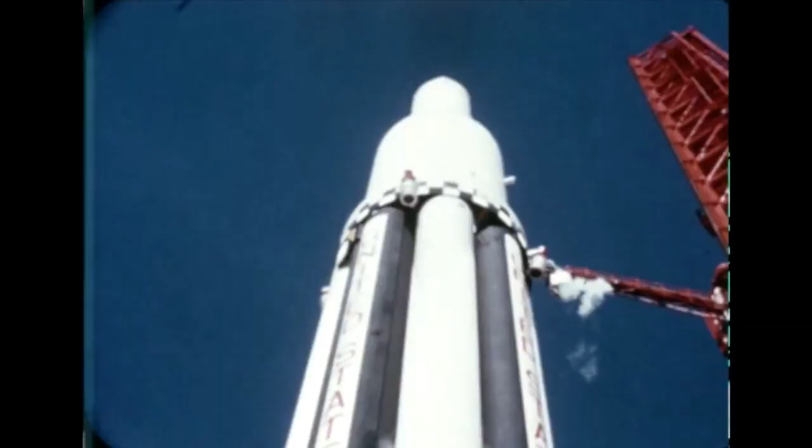Highlighting this report period on November 16th was the successful launching from Complex 34 at Cape Canaveral of the third Saturn C-1 flight vehicle, SA-3.

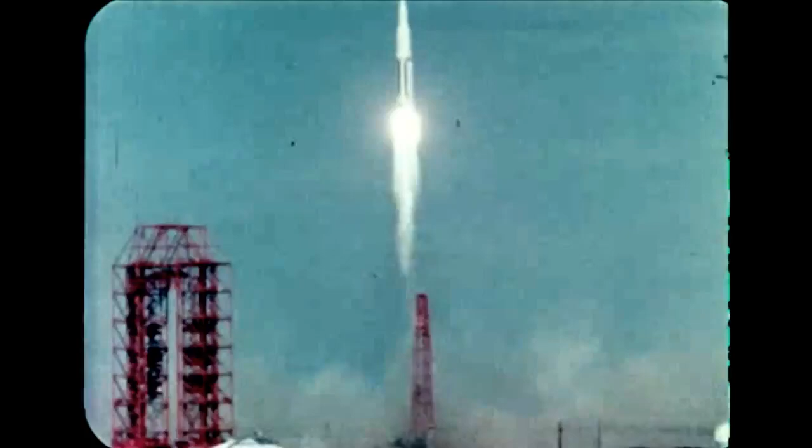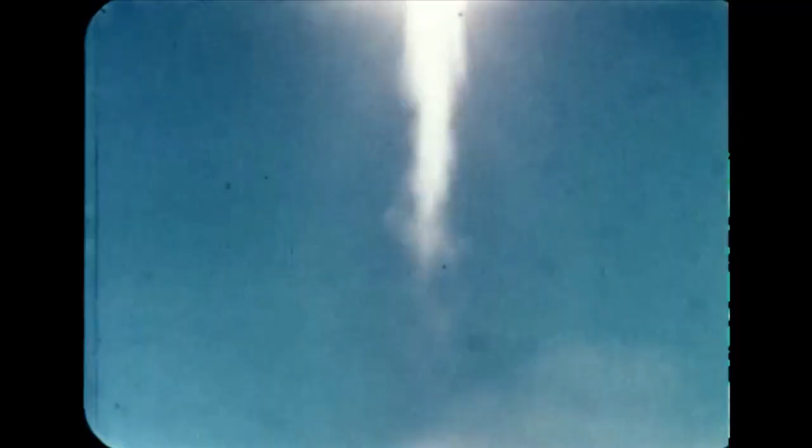Similar in major aspects to the previously successful SA-1 and SA-2 flights, SA-3 performed several additional missions contributing to development of the Block II SA-5 and beyond version of the vehicle. For example, an engineering model of the ST-124 stabilized platform was carried as a functional passenger, though not in control. And although no stage separation was attempted, Block II retro rockets were successfully test-fired.

The booster carried a full load of propellant, some 750,000 pounds, instead of the 620,000 pounds carried earlier. SA-3's weight was almost as great as that of later vehicles, which will have 188,000-pound thrust engines, although SA-3's 8 H-1 engines were rated at 165,000 pounds thrust each.

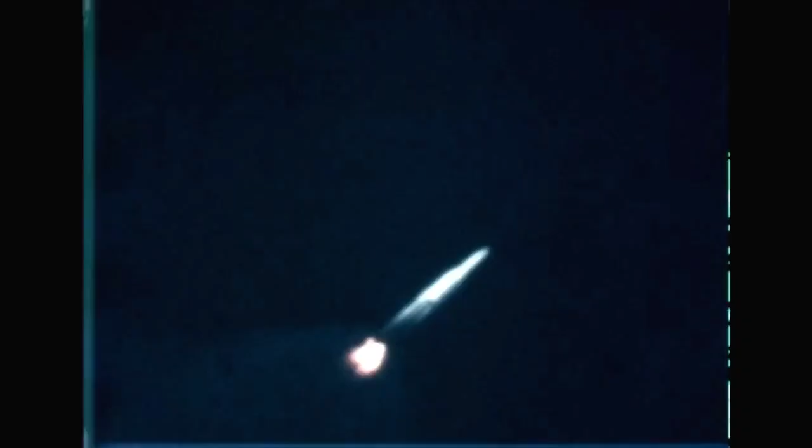SA-3 was the most heavily instrumented rocket ever launched by the United States, transmitting 716 measurements to ground stations. Analysis of telemetry data indicated that the vehicle performed precisely as expected. SA-3 reached maximum altitude of 104 miles, range was 270 miles, and velocity 4,000 miles per hour. Flight time to impact was slightly over 8 minutes.

SA-3's two inert upper stages, laden with 95 tons of water simulating fuel, were deliberately exploded on schedule at 104 miles altitude, 292 seconds after liftoff, in a study of the basic physics of the ionosphere. Satisfactory data on this experiment, known as Project Highwater, were recorded. A similar experiment had been conducted on the SA-2 flight.

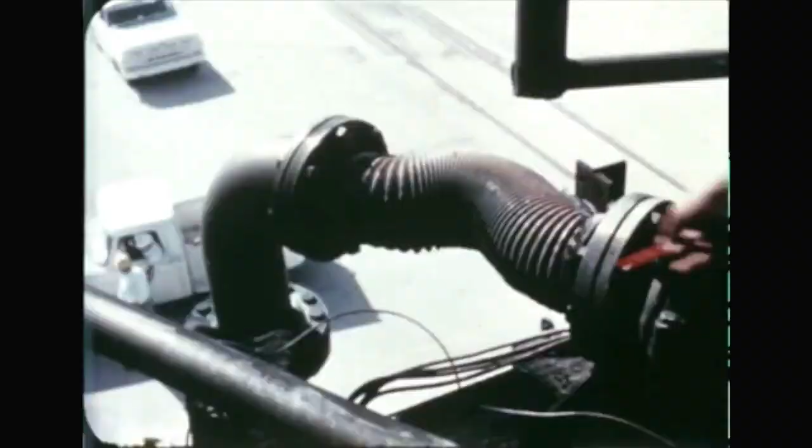More damage was done to ground support equipment by SA-3 than on previous launches because of lower liftoff acceleration resulting from the additional 130,000 pounds of propellant. However, damage was not considered excessive.

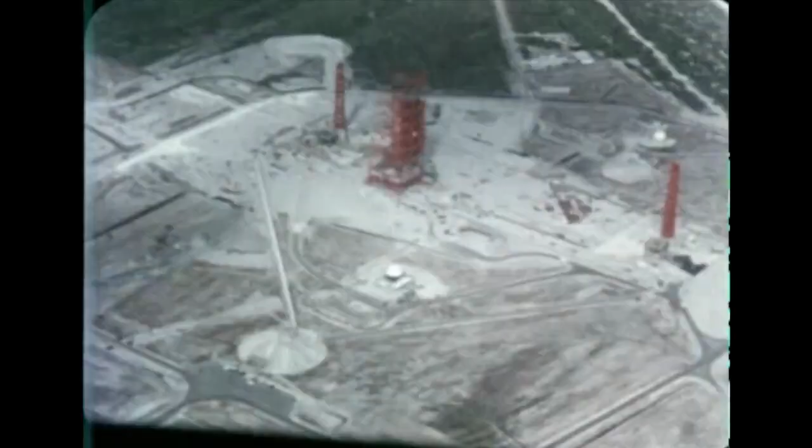Half a mile north of SA-3's launch site, construction progress is on schedule at Launch Complex 37, being built to handle launching of Block II vehicles. Pad B is expected to be operational in March. Beneficial occupancy and final inspection of the Launch Control Center was accomplished in early November. Work on the launch site surface structure is progressing, with hydraulic lines being installed and work on pneumatic lines underway.

Pad A is scheduled to be operational about 3 months after Pad B. Erection of primary structural steel for the umbilical tower is complete, and delivery of structural steel for the launch pedestal has begun. At the automatic ground control station, concrete is being finished and drains and electrical conduit installed.

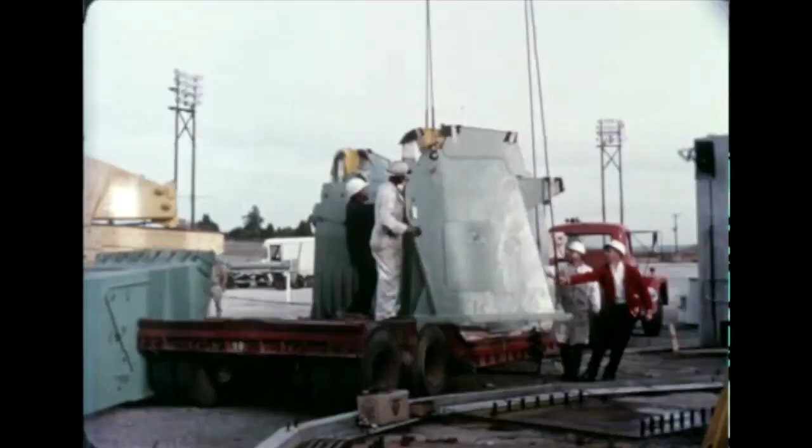The new combination support and hold-down arms for Block II launch pedestals were delivered by the manufacturer, Hayes International of Birmingham, to the Marshall Space Flight Center this quarter for testing. Afterwards, they'll be shipped to the Cape for installation at Launch Complex 37. The arms will support and hold down the Saturn vehicle after ignition until proper thrust condition for liftoff.

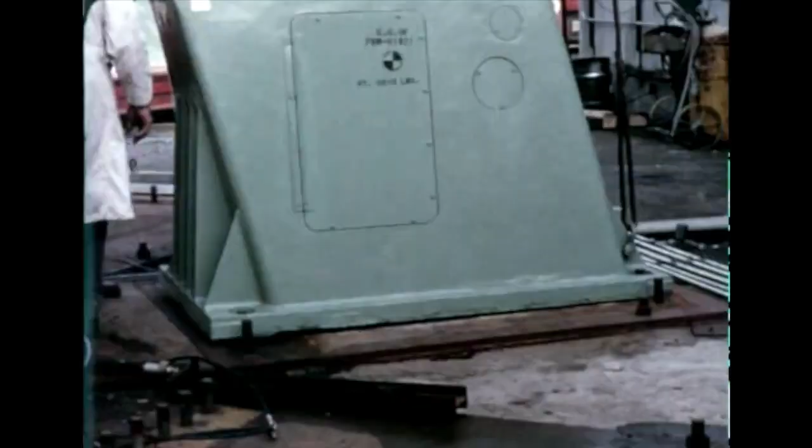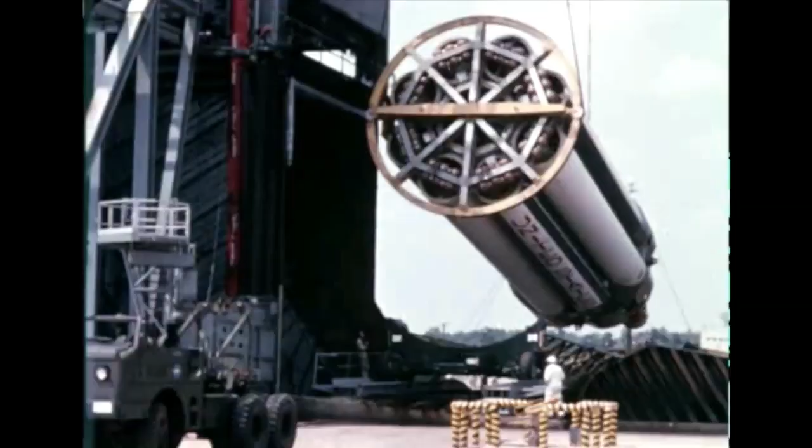The fourth Saturn flight vehicle, SA-4, was removed from Marshall's static test stand on October 1st, having completed its static testing with a full duration firing the previous week. After undergoing post-static rework and modification, the SA-4 booster was transferred to final checkout on October 22nd.

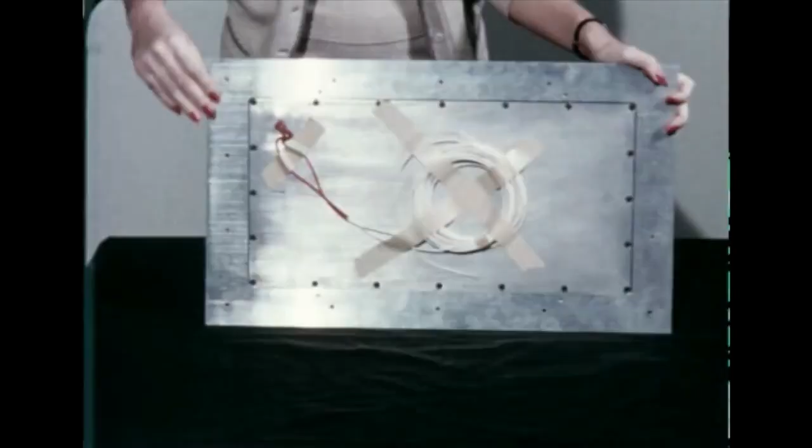A micrometeorite detector device designed to measure the density of small, high-speed particles encountered at high altitudes will be initially flown aboard SA-4 as an inactive passenger to see how it withstands environmental conditions. If telemetered results are satisfactory, the device may be operative on later Saturn flights.

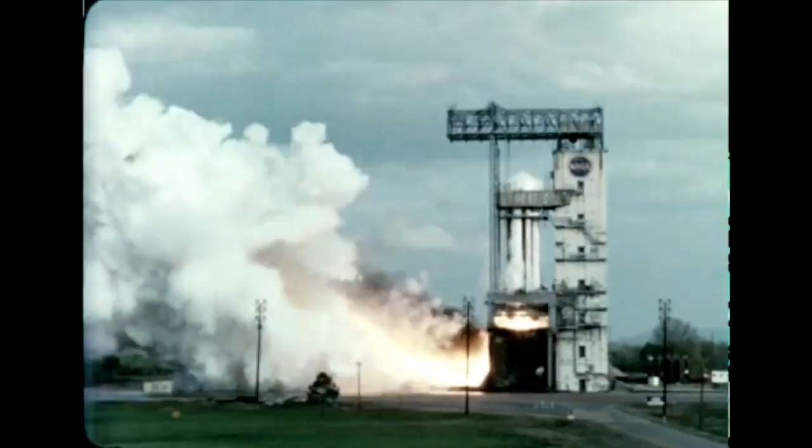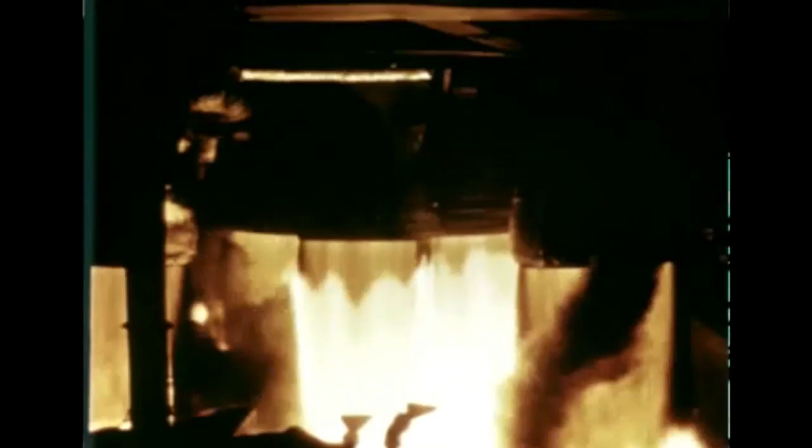Three static firings of the test booster SA-T4.5 were held during this report period, with engines developing 1.5 million pounds thrust. Test objectives were to check integrity of the propulsion system and effect of the 188K engines on the flame deflector. The test booster was removed from the stand on November 15th.

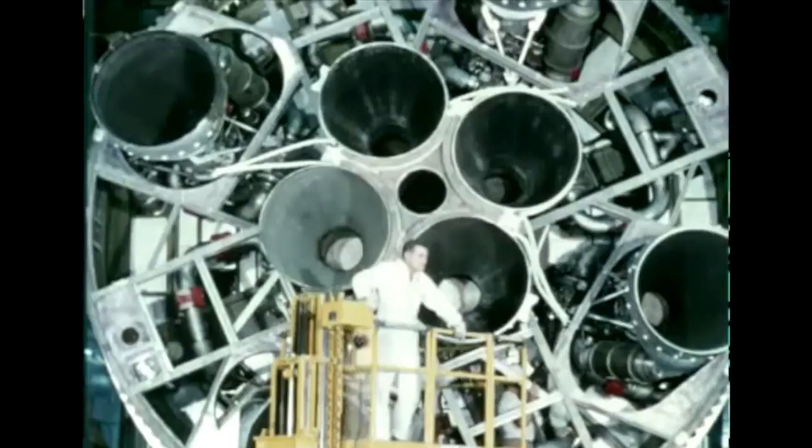The final engine was installed on the booster for the fifth Saturn flight vehicle, SA-5, on October 11th, and the stage was later released for pre-static checkout, expected to be completed in mid-January. A decision has been made to fly a Jupiter-type payload body on SA-5 rather than the Apollo boilerplate configuration as originally proposed.

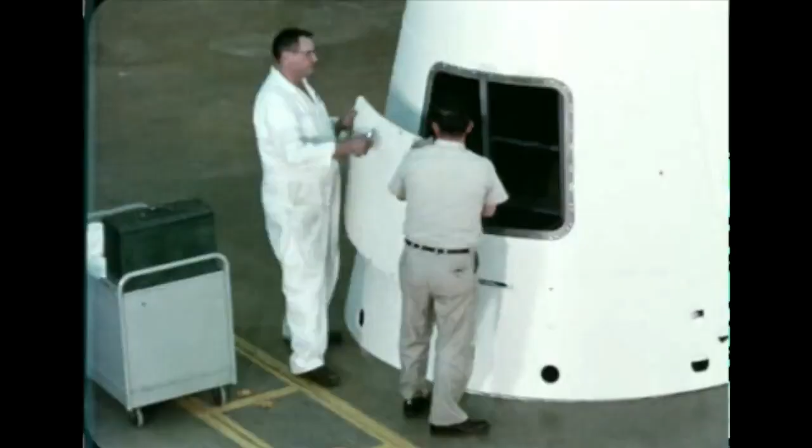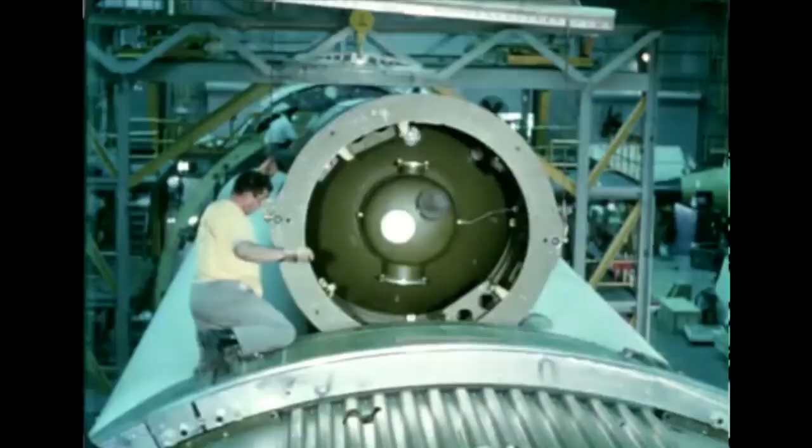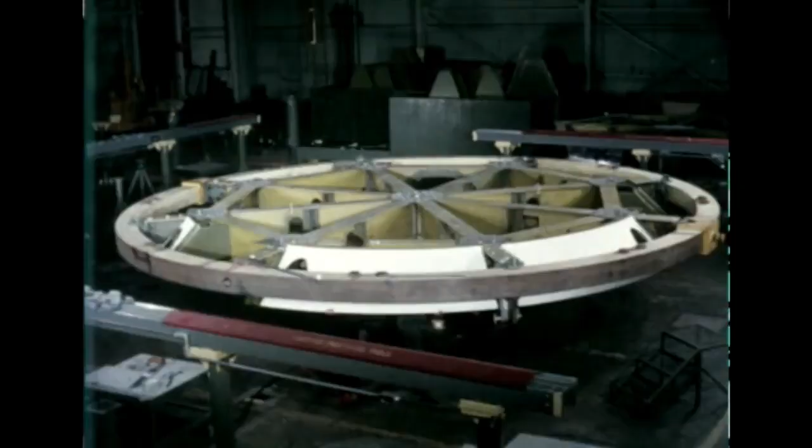Assembly of the booster for the sixth Saturn flight vehicle, SA-6, begun on September 24th, proceeded this quarter with clustering of tanks completed and installation of engines underway. Fabrication of the tail section of the booster for the seventh flight vehicle, SA-7, was finished in December. The vehicle's interstage adapter was also completed. SA-7 booster assembly is scheduled to begin in January.

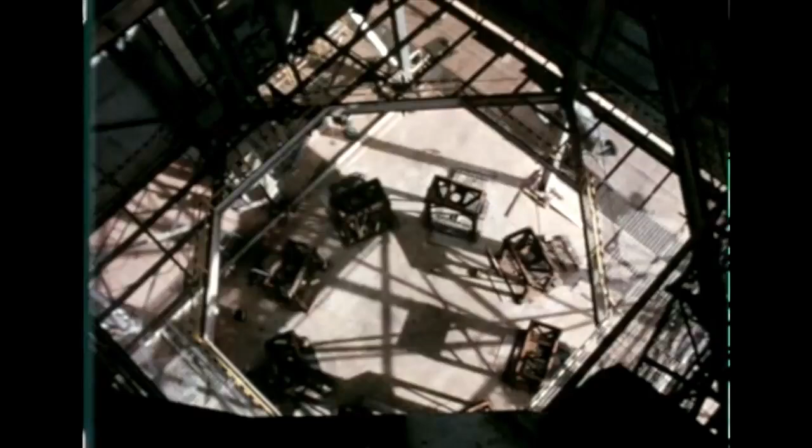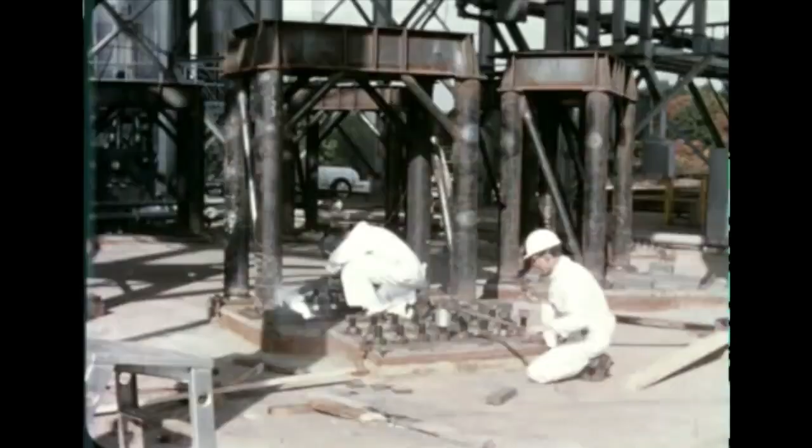Modification of Marshall's dynamic test stand to accept the dynamic test vehicle SA-D5 was finished in October. Major alterations included cutting away of a portion of the grillage in order to accommodate the longer Block II type vehicle, plus installation of new support pedestals at the base of the stand.

Assembly of the Block II dynamic test booster was completed early this quarter, and the stage was erected in the dynamic test tower on November 13th after weighing and center of gravity determination.

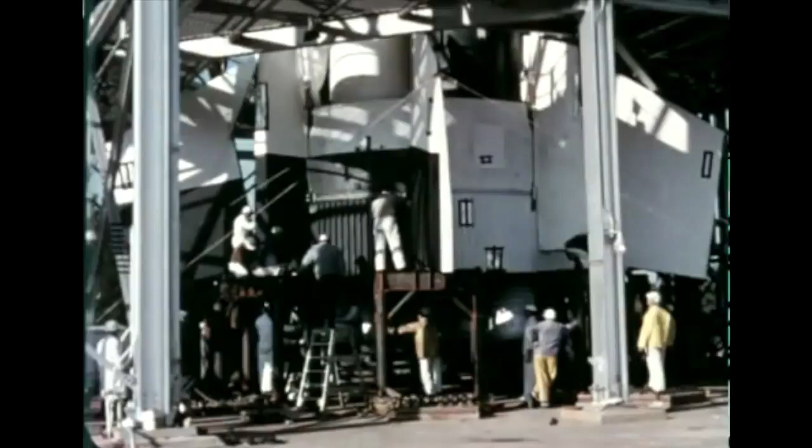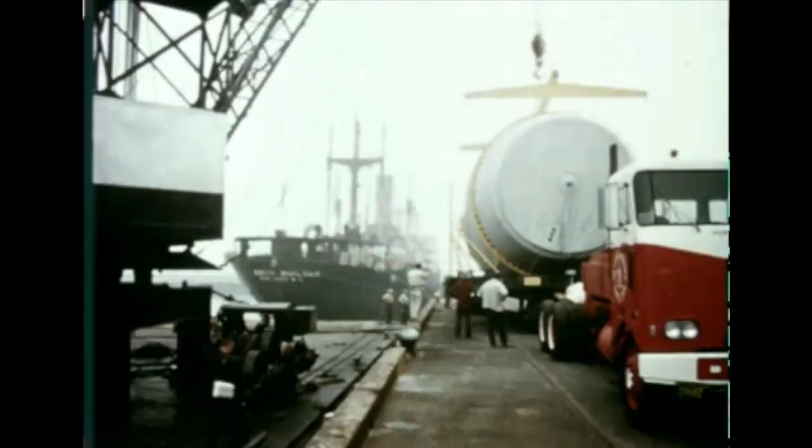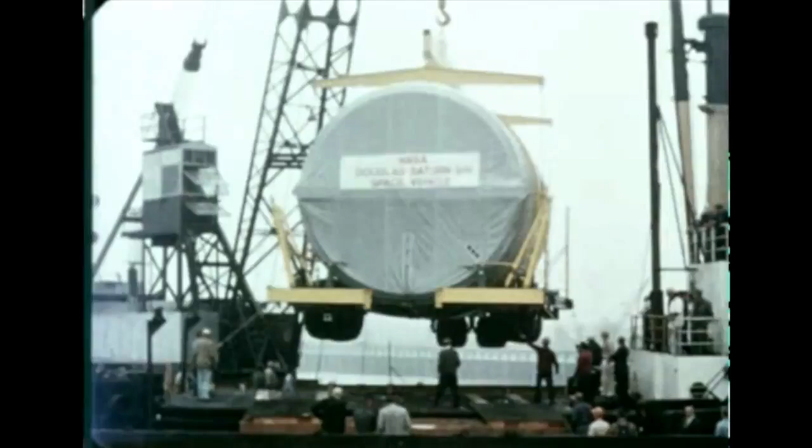The S-IV hydrostatic dynamic stage, which forms the upper stage of the SA-D5 dynamic test vehicle, was completed this quarter by Douglas Aircraft Company, S-IV prime contractor at Santa Monica, and was prepared for shipment. On October 26th, the stage was moved from the Douglas plant to the docks at nearby San Pedro. Cradled in a specially built 25-ton transporter, the S-IV was loaded aboard a steamship to begin its 3,500-mile journey to the Marshall Space Flight Center.

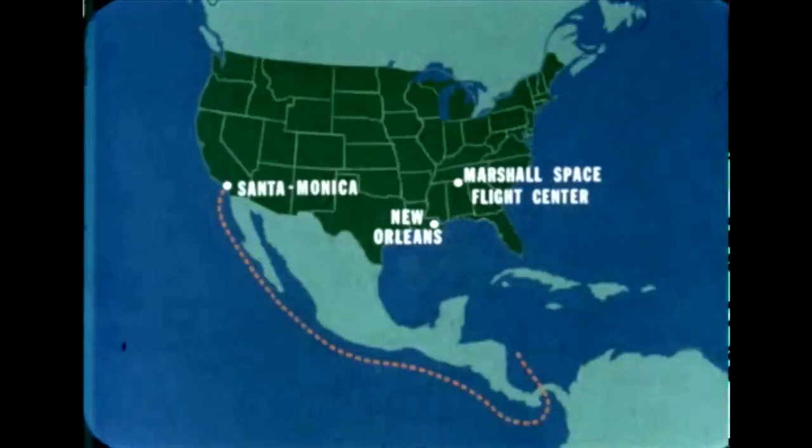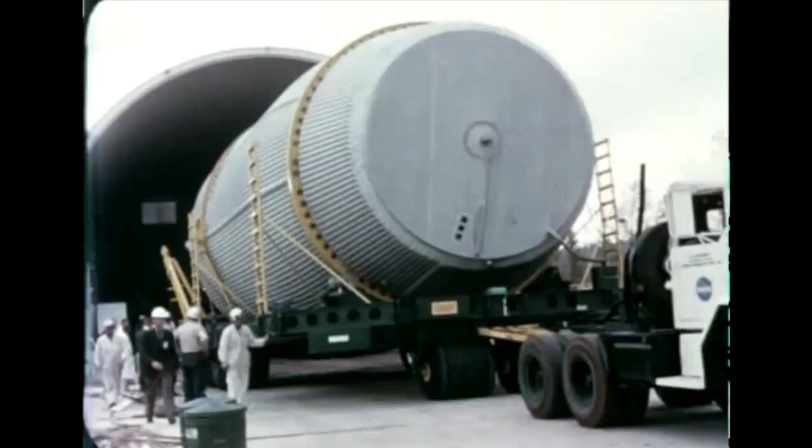This marked the first time a Saturn stage has been shipped by water from a West Coast manufacturing site through the Panama Canal to a test or launch site in the east. Other stages will follow. The S-IV stage arrived at Marshall on November 16th after a 23-day journey. It had been transferred to the Saturn barge Promise at New Orleans for the river portion of the trip.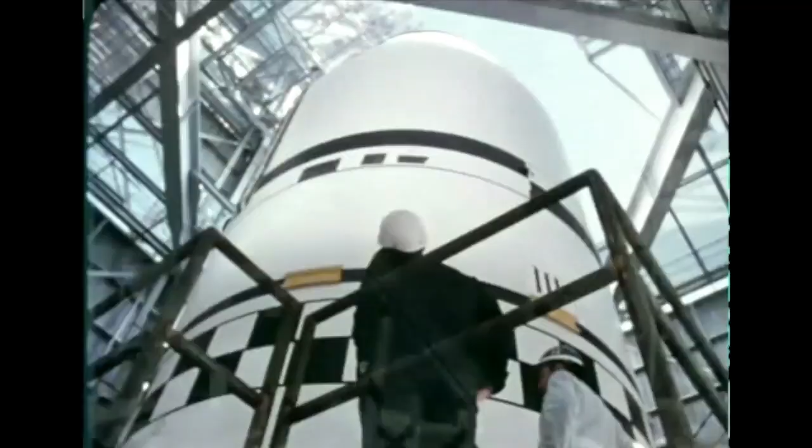At Marshall, the S4 stage was installed atop the SAD5 booster. The stage is scheduled to remain at Marshall for several months. Its external configuration, weight, and other characteristics are the same as those of the flight stage, which will be a part of SA5. After installation of the instrument unit, payload adapter, and payload to complete the vehicle, SAD5 was made ready for dynamic testing, scheduled to begin in January.

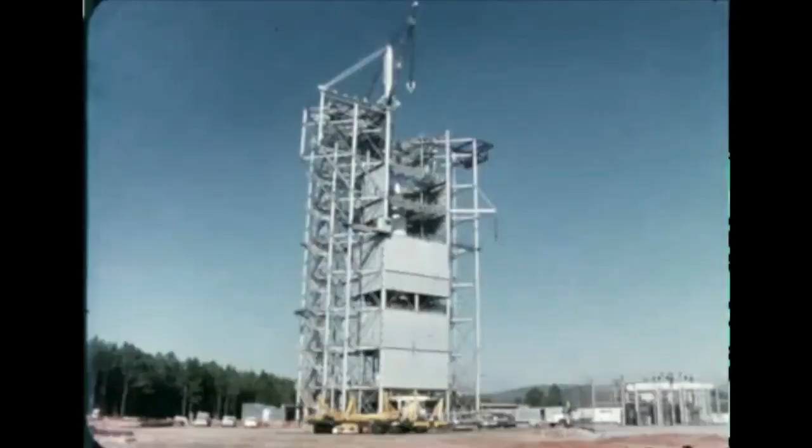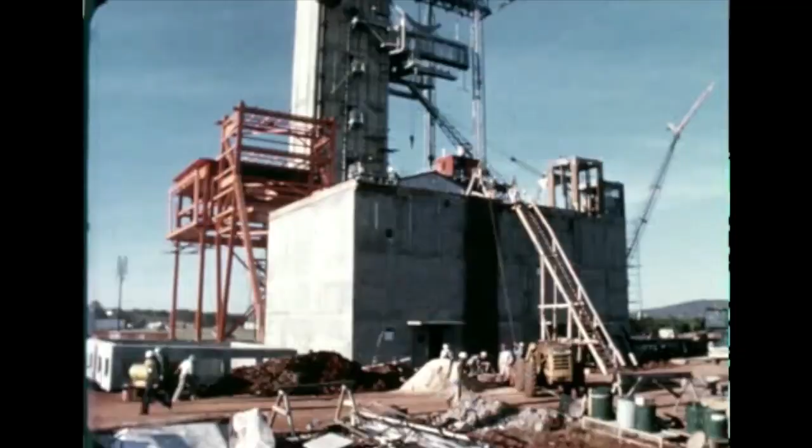Modification of Marshall's C1 static test stand to accommodate two boosters continued this quarter. Steel superstructure and basic plumbing now stands at the 4th level. Adjacent to the stand is the annex, which will house office and shop personnel. Units such as the elevator, air conditioners, and heating ducts are being installed.

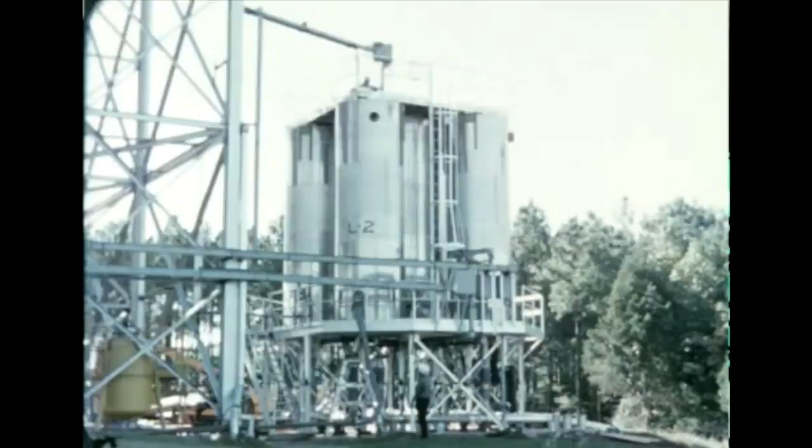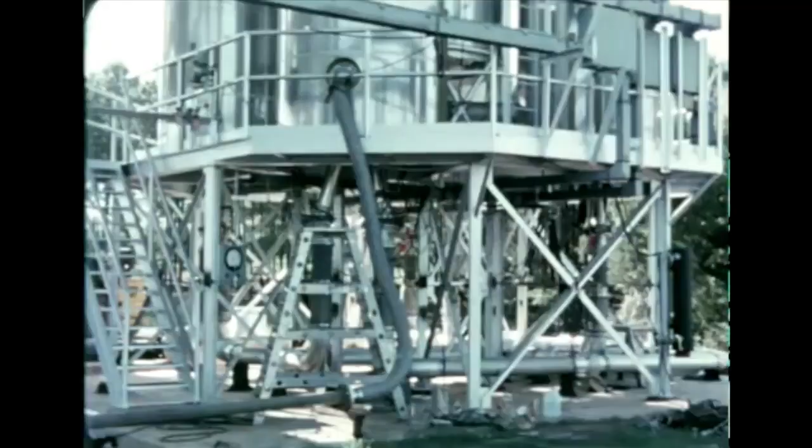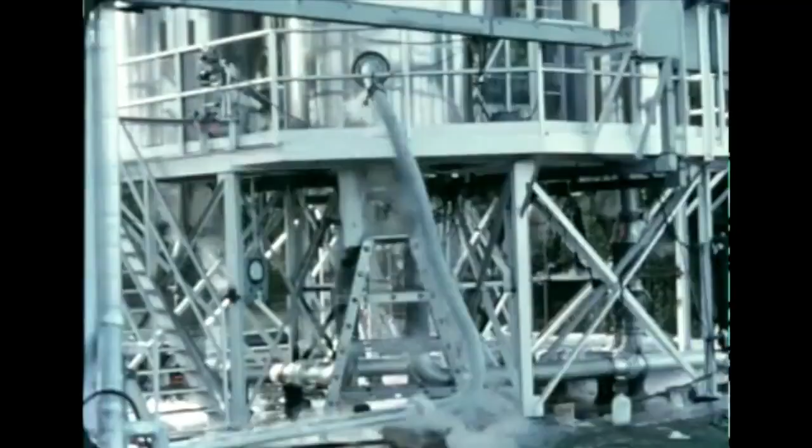Using a scale model of the Saturn booster tank assembly, a series of liquid oxygen boil-off tests were run at Marshall to determine system flow under simulated flight conditions. For safety, liquid nitrogen was used to simulate LOX. Purpose of the test is to find out how much boil-off occurs in a given time and to verify that tanks empty simultaneously.

Discharge tubes carry the liquid nitrogen from the test stand to the point of discharge. Liquid nitrogen vapors hold close to the ground and are highly visible. Line flow is monitored by movie cameras to study vortexing conditions in the suction line and undesirable gassing in the system.

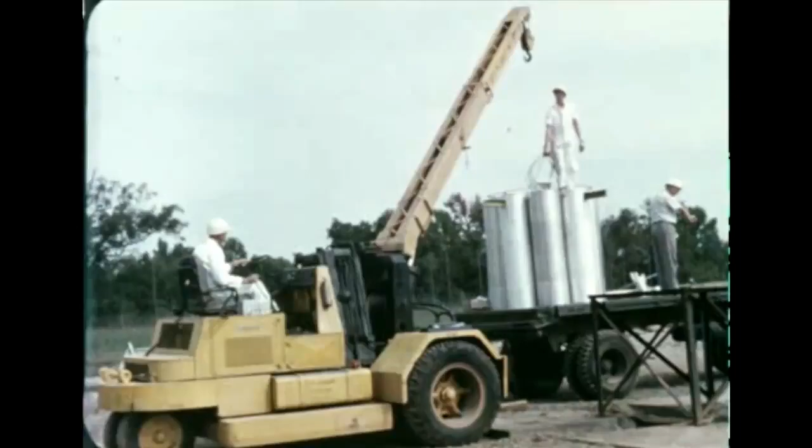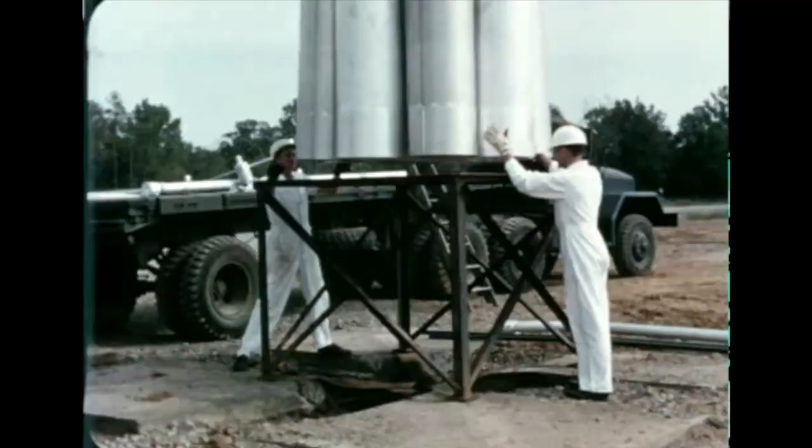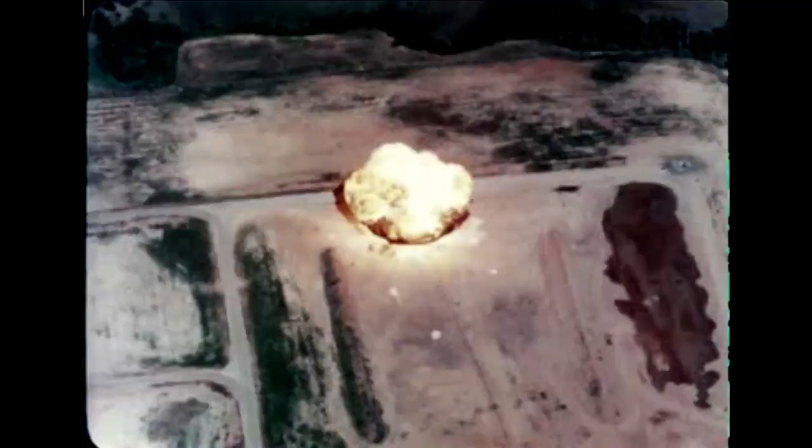Using scale model tanks to represent Saturn boosters, tests are being run at Marshall to determine the most desirable method of controlling propellant dispersion in event of range safety destruct or accidental explosion. An external destruct system has proven most effective using primacord and flexible linear-shaped charges installed longitudinally on the cylindrical portions of all tanks. Upon ignition, these charges rupture the containers, and internal tank pressure causes an outward dispersion of the LOX and RP1 propellants, greatly reducing their mixture and the resulting explosion. After engineering refinement, the external destruct system will be employed on SA-5 and subsequent vehicles.

The first two production models of the ST-124 stabilized platform were delivered to Marshall this quarter by the manufacturer, Bendix Corporation. ST-124 units will be flown as functional passengers, though not in command, aboard SA-5 and SA-6. Beginning with SA-7, the ST-124 will be the command unit.

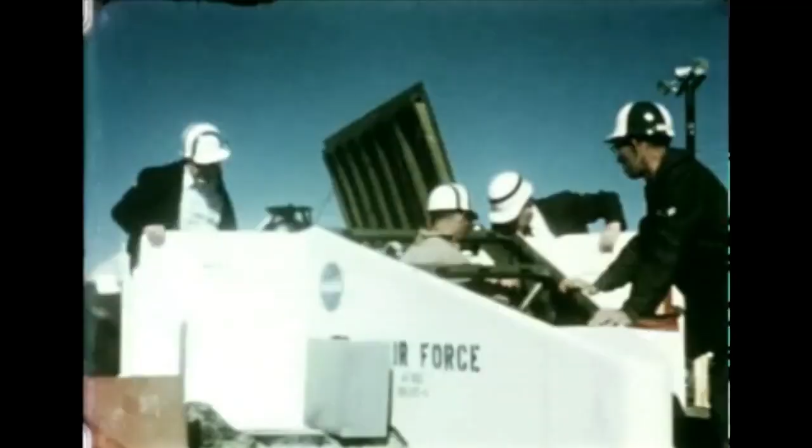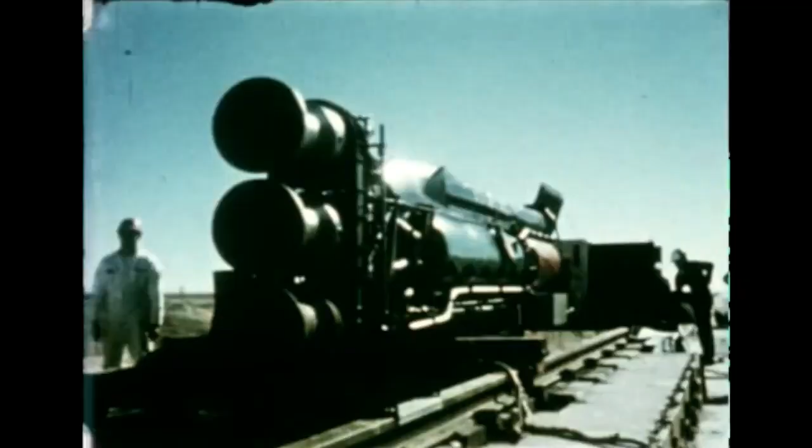One of the ST-124s was later shipped to Holloman Air Force Base, New Mexico, for a series of rocket sled tests. 4 telemetry links provide 48 channels of information to measure performance during the 7-second, 5-mile trip along the sled track, where the unit sustains a maximum of 8 Gs for 3 seconds. The sled reaches maximum speed of approximately 1,000 miles per hour. Test results were satisfactory, indicating the ST-124 will stabilize as desired.

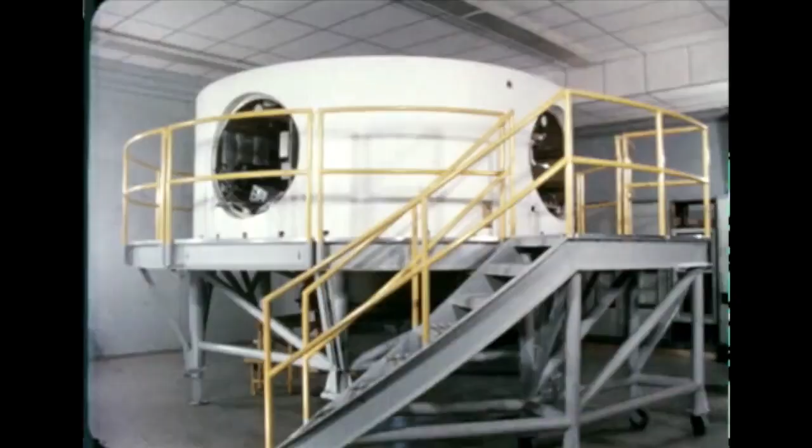A prototype of the Saturn Block II instrument unit, which will house the ST-124 stabilized platform, together with other components necessary to perform the functions of guidance, navigation, instrumentation, measurement, and telemetry, began undergoing checkout this quarter in a recently completed automatic checkout facility at the Marshall Center's Astrionics Division.

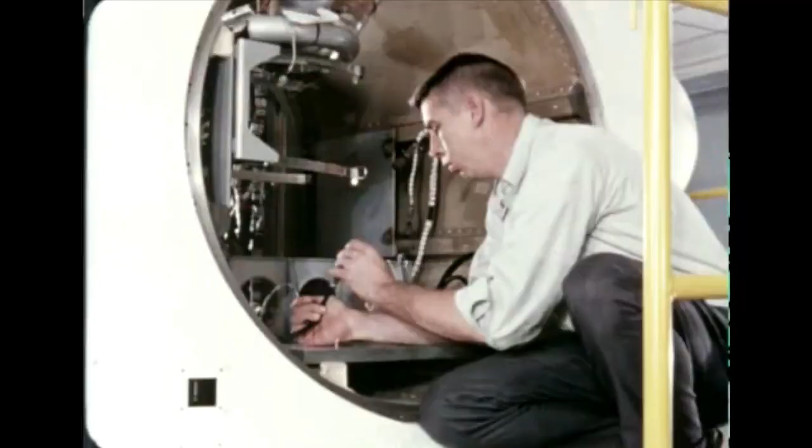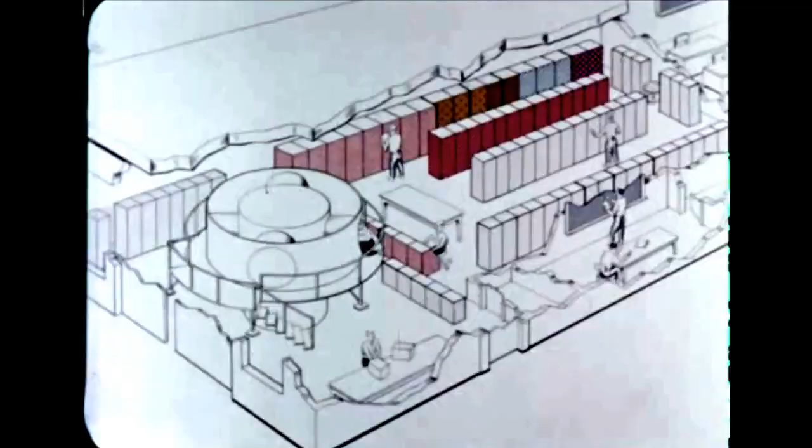The facility, which will also simulate Saturn C-1 vehicle checkout at the launch site, consists of a launch control computer, signal conditioning, countdown clock, digital data acquisition ground station, automatic instrumentation stimulus, instrument unit electrical support equipment, manual electrical support equipment, S1 stage substitute, power distribution, systems interface, facility recorders, propellant tank system, and instrumentation unit interface.

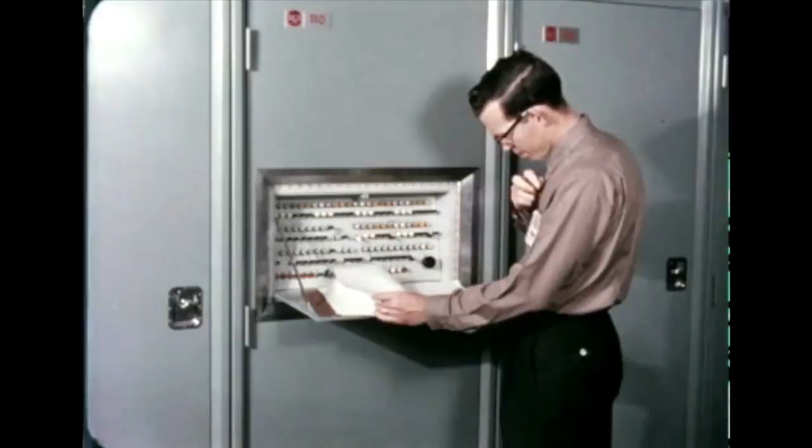The automatic checkout facility has the prime objective of assuring compatibility of the entire Saturn vehicle with each unit of its electrical support equipment and confirming design of such equipment prior to its installation at Cape Canaveral. The vehicle is simulated for checkout purposes by utilizing flight-type distributors, sequencers, and other electrical flight hardware.

At Marshall's Quality Assurance Division, an automated checkout concept for Saturn stages was used in part for the first time this quarter in connection with the SA-4 booster and will be used in its entirety next quarter on the SA-5 booster.

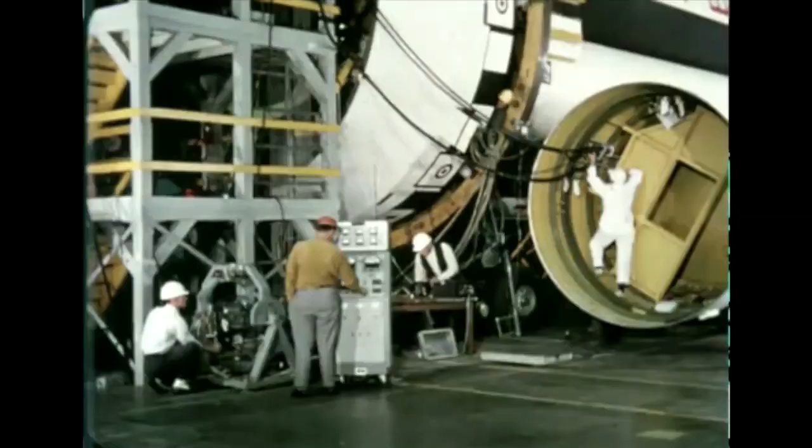The checkout concept includes 10 widely separated remote stations, each assigned specific test missions, serving as satellites to the central computer complex, the heart of the entire system. The computer complex consists of 3 Packard Bell 250 general-purpose computers, communicating with each other by sharing common memory elements under a master-slave structure.

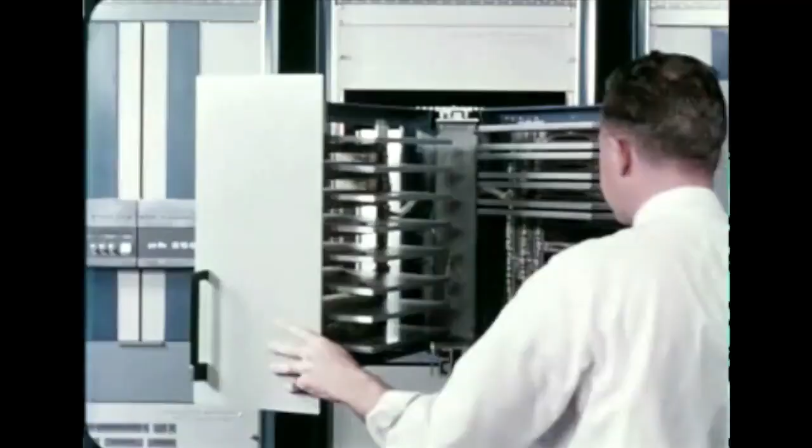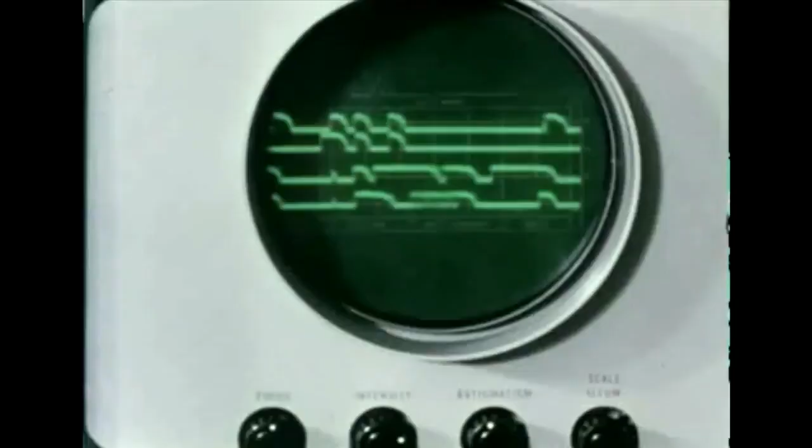The Saturn hardware forms a closed-loop system which provides stimuli generation, switching, and response retrieval, all under computer control. Transmissions between the computer and test stations are digital, permitting location of the test stations at a considerable distance from the computer complex. The test stations include instrumentation and telemetry systems and components, guidance and control systems, radio frequency systems, network systems, electrical components, and mechanical systems, assemblies, and components.

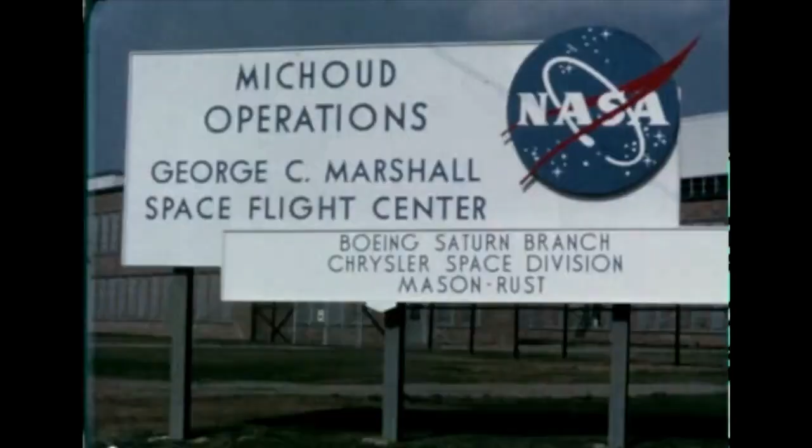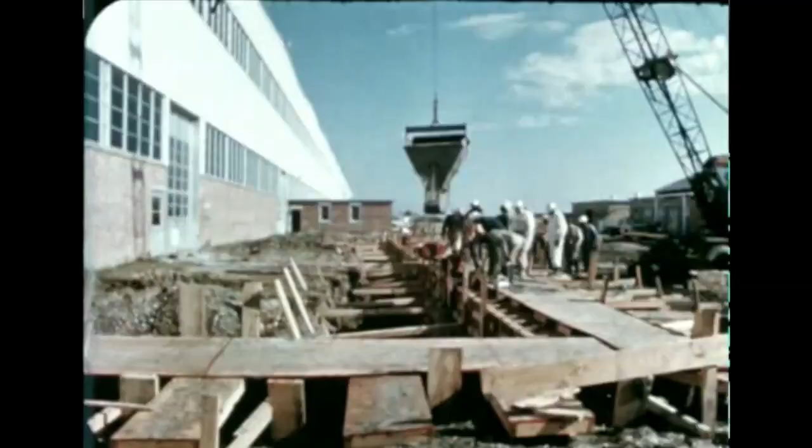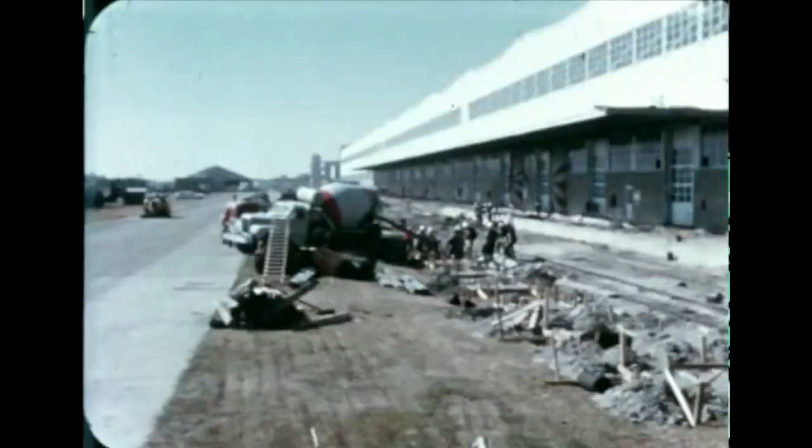At Marshall's Michoud operations in New Orleans, being readied for Chrysler's production of C1, C1B boosters, renovation and construction work this quarter included build-up of the shipping and receiving ramps from which the huge plant is serviced by rail and truck. A new 40-foot vertical lift door is also being installed at one end of the building to permit movement of boosters. All construction work is being done under direction of Michoud's support services contractor, the Mason Rust Company.

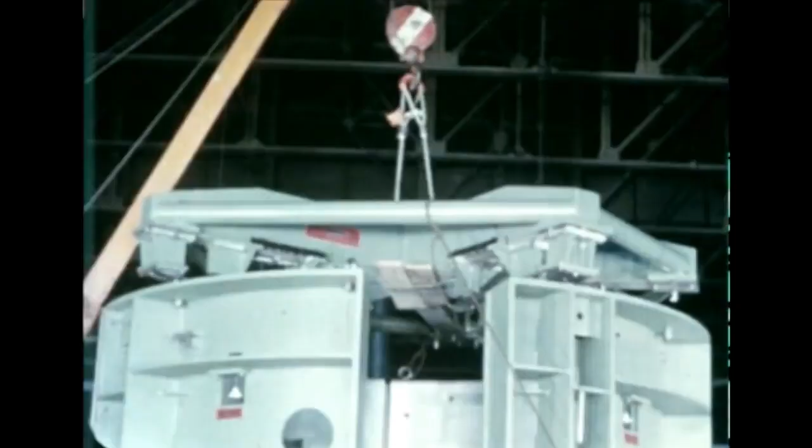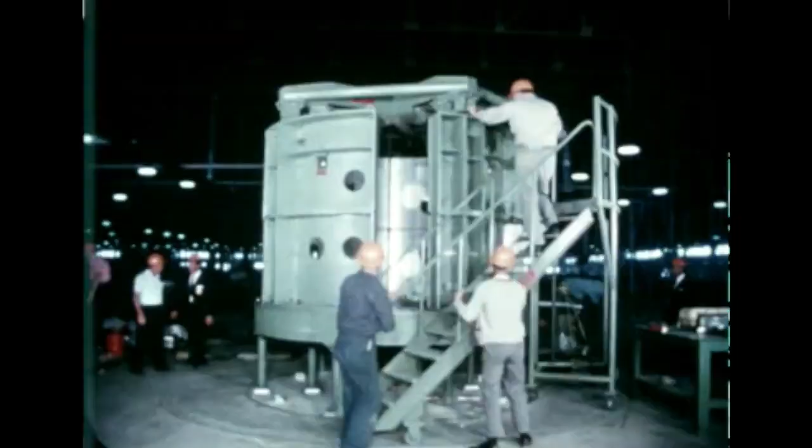Installation of Saturn booster assembly fixtures at Michoud by Chrysler was well underway this quarter. Early in November, the barrel assembly fixture was emplaced in the tail assembly area. Here, the booster's upper and lower thrust rings, skin assembly, and shear web assembly will be constructed. The thrust structure fixture was also installed on its foundation. Optical alignment to precisely level the large fixture was accomplished by the vendor and checked by Chrysler Tool Engineering personnel. This fixture will be used to tie together the barrel assembly, the 8 outriggers, and their connecting structure.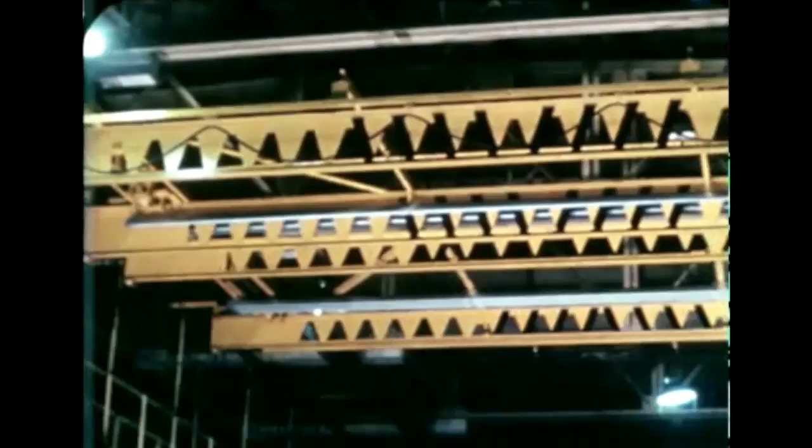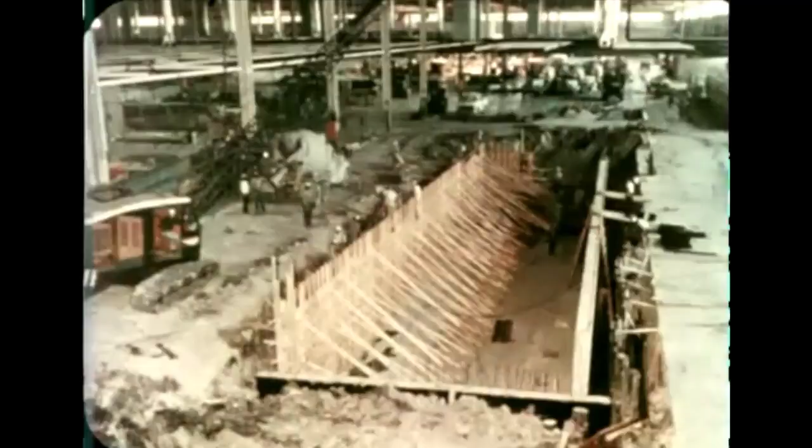Installation of rails, control cabs, hoists, and electrical circuits for the overhead crane systems in the tail assembly area continued. These cranes will be used to move the upper and lower thrust rings, barrel assembly, thrust structure, and other components from one workstation to another in the tail assembly area. Work on the surface treating pit is progressing, with laying of forms and pouring of concrete accomplished. The sump pump area and flooring and sidewalls for the area to contain the large treating tanks have also been finished.

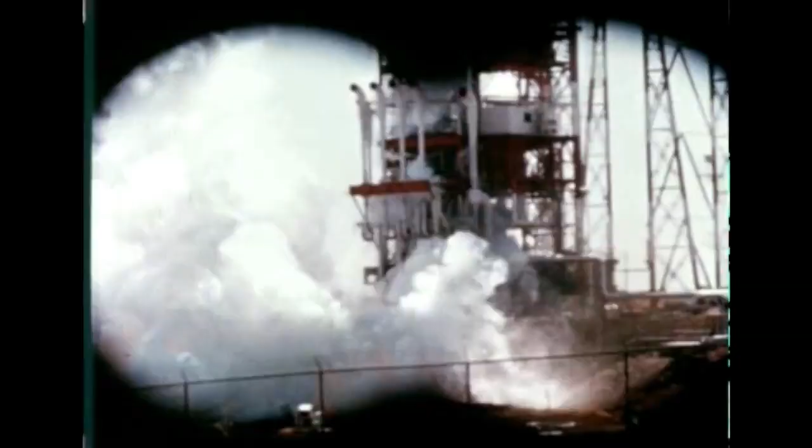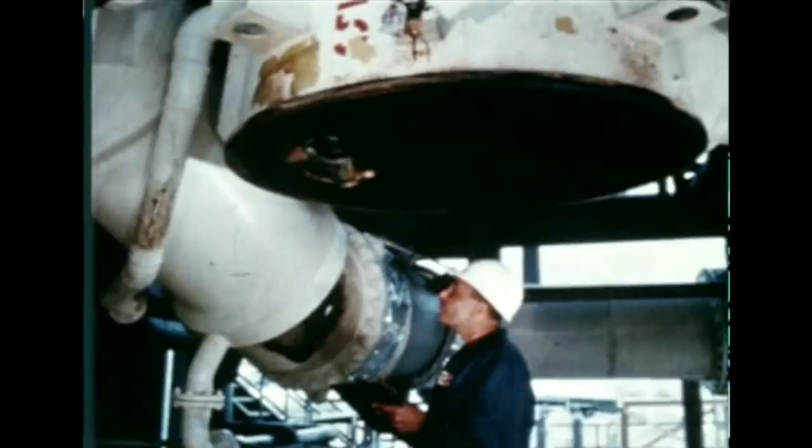At Douglas Aircraft Company's Sacramento test facility, a highlight of this report period occurred on October 4th: the first successful full-duration static firing of the 6-engine S-4 stage battleship configuration. All RL-10 engines ignited properly under simulated altitude conditions and fired for 7 minutes at full thrust of 90,000 pounds. The bottom sections of all diffusers on test stand number 2 exhibited extreme erosion and required replacement with diffuser caps taken from test stand number 1. Certain modifications were made to allow greater cooling of these caps by increased water flow through them.

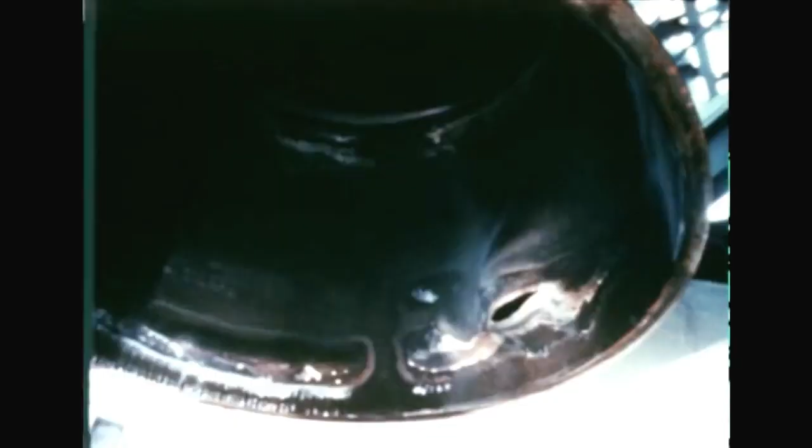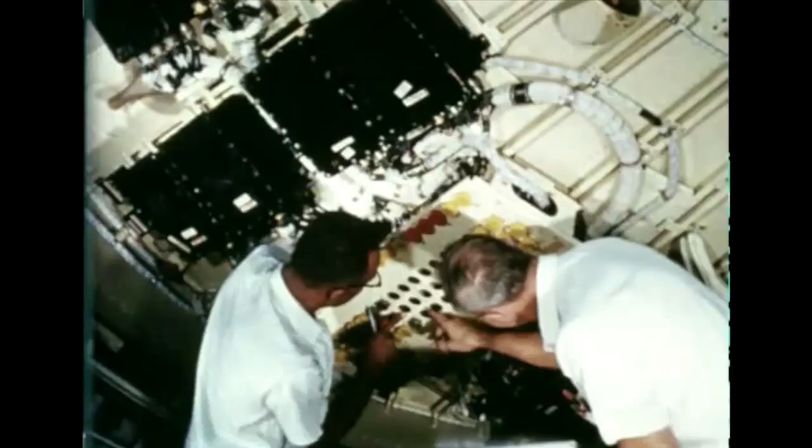The S-4 all-systems vehicle, after tank cleaning in Douglas's hydrostatic tower, has been moved into a plant area where installation of its electrical systems will take place, and the stage made ready for its static firings at Sacramento in 1963. In the vehicle checkout area, the first set of ground support equipment has been installed. This is the Phase 1 set of GSE, which had previously been systems tested in Douglas's Culver City Facility System Integration Area. All available articles of Phase 2 GSE have now been installed in the systems integration area, and GSE system tests have begun with the GSE test set and the S-4 stage mock-up.

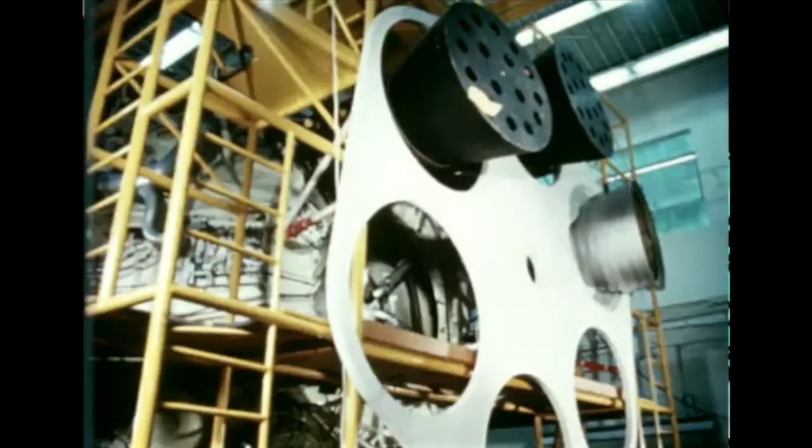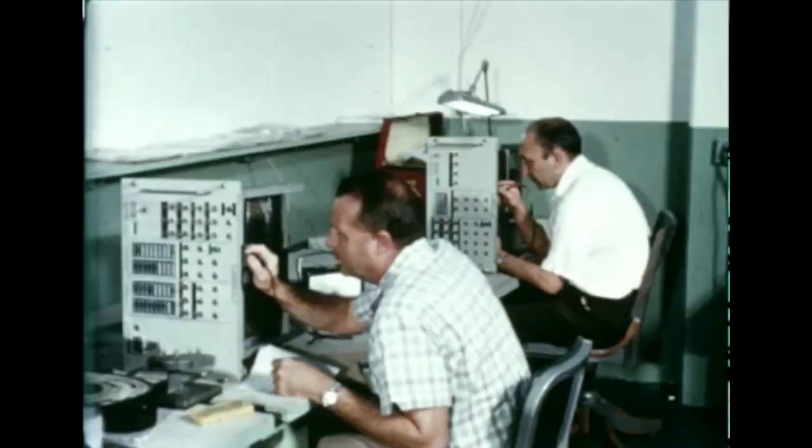A telemetry test and evaluation console is used to monitor the various instrumentation circuits. During these operations, checkout and calibration procedures are also developed. In an adjacent testing bay, vehicle and GSE end items and subsystems which require individual checking are acceptance tested against specialized consoles. Phase 2 equipment will be shipped to Sacramento for use on the all-systems vehicle in January. Other sets will later be checked out for delivery to the Saturn launch site at Cape Canaveral.

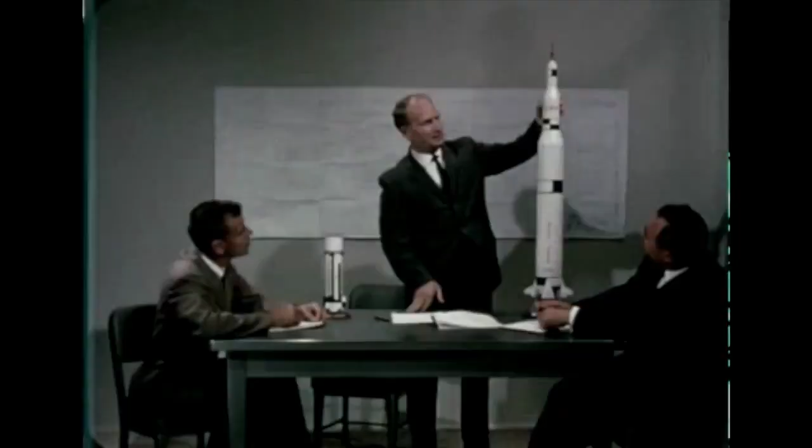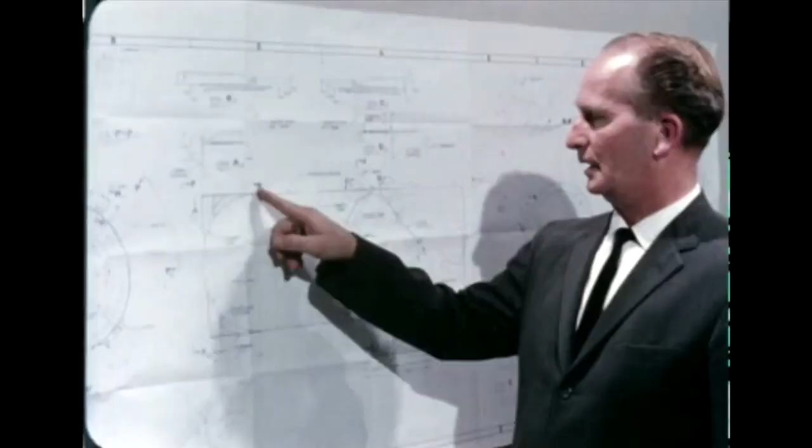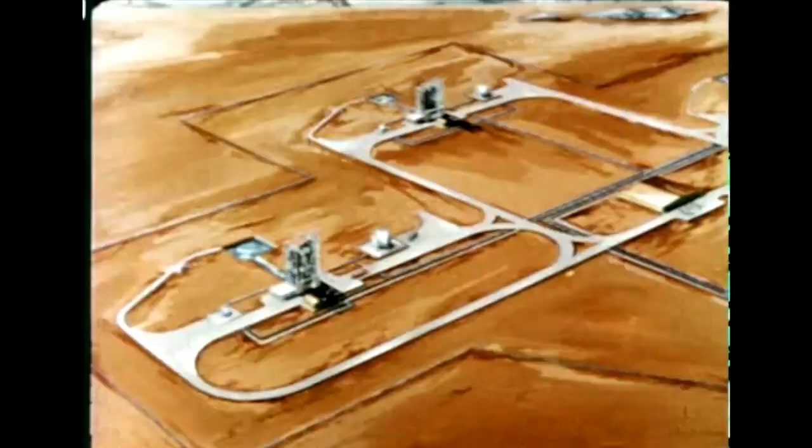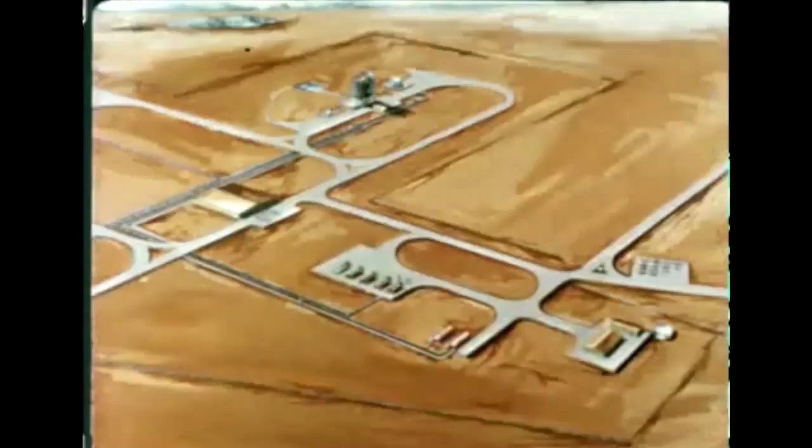Douglas has also begun studies on application of the S4B stage, third stage of the advanced or C5 Saturn, to the C1B vehicle. The work includes investigation of minimum changes to the C5 type stage for C1B missions, plus S1, S4B interface and stage separation. The S4B structural layout drawings being prepared by Douglas are nearing completion, and work has begun on detailed stage structural drawings. Plans for a facility for ground testing of S4B stage at Douglas Aircraft's Sacramento area were outlined in late November. The test complex will include static test stands, blockhouse, propellant, and high-pressure gas systems and supporting utilities.

At Rocketdyne Division of North American Aviation, contractor for the J2 engine, which will power the S4B stage, a major milestone was reached this quarter when, on October 4th, the first full-duration static test of the liquid hydrogen-fueled engine was held. Coming 8 months and 5 days from the time of the J2's initial static test, the firing ran for more than 4 minutes at full thrust of 200,000 pounds.